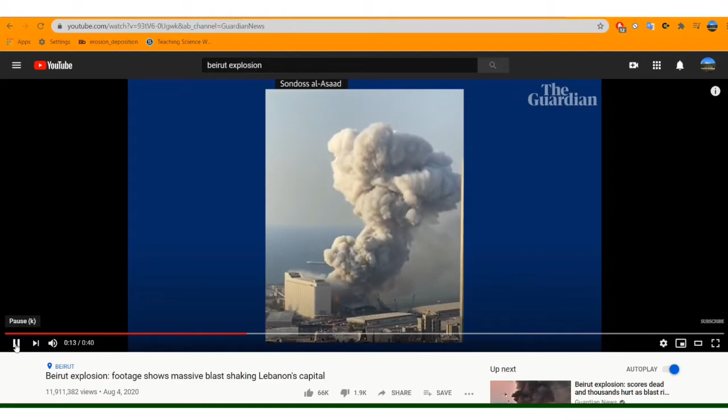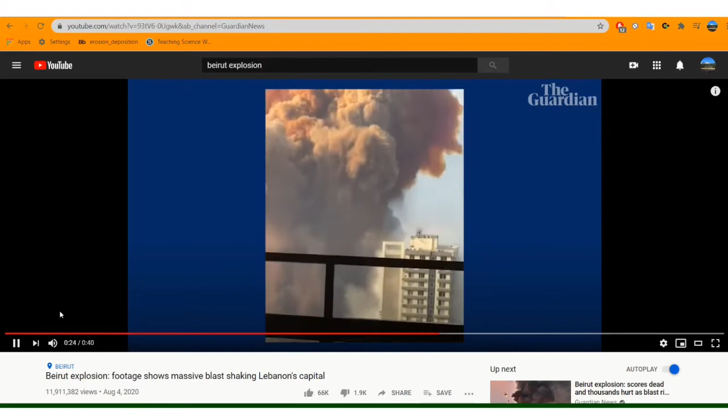Now, when you have an explosion inside your car, you don't want the energy to go out in all directions. You want it to go in one direction that will power the piston that drives your car.

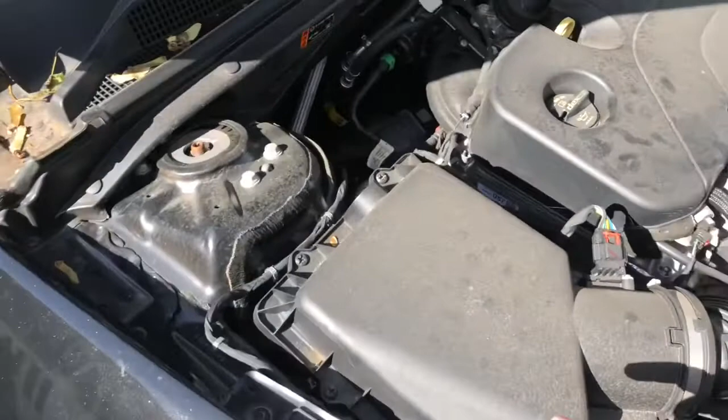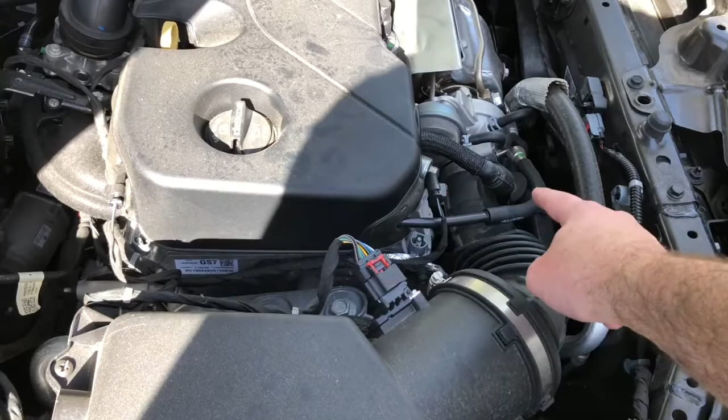So we said that in order to unlock the energy within the gasoline, we need to add oxygen to that. So how does that happen in a car? Well, the air enters through the grill in the front of your car. It then passes through the car engine air filter because you don't want particulate matter getting into the engine. Once all the particles are removed, the air can pass down through this tube into the engine itself.

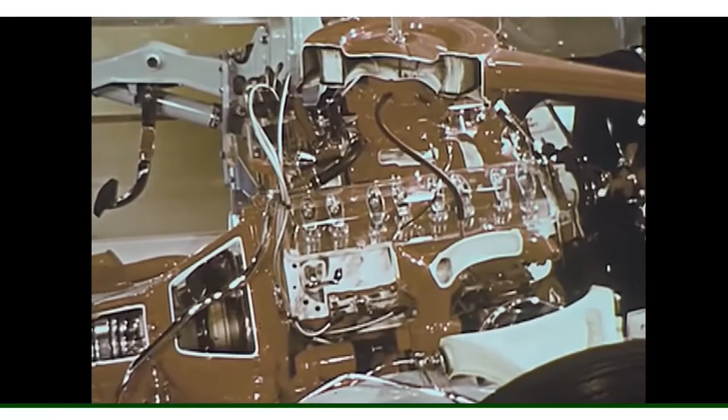Gasoline and air mixed together form an explosive mixture. The basic job of the engine is to convert this explosive energy into motion. To contain the explosion, the engine uses a cylinder, and fitting snugly within the cylinder, a piston that slides up and down.

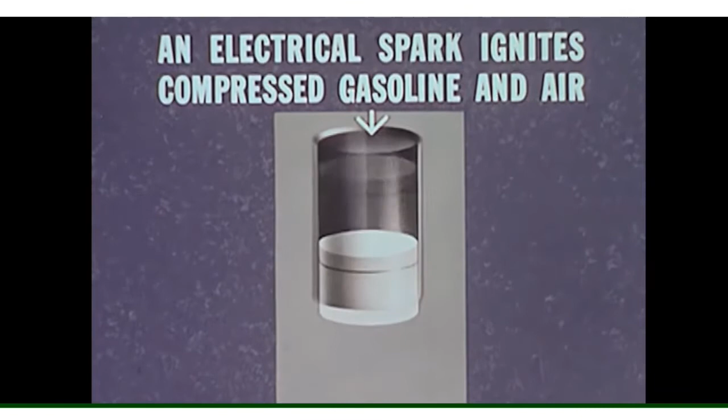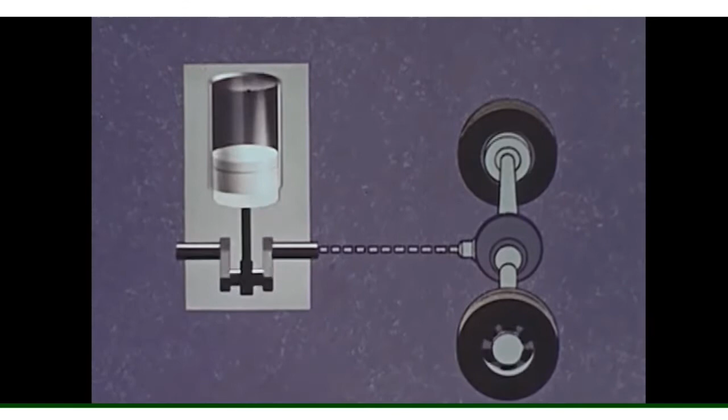Inside the cylinder, an electric spark ignites the compressed gasoline and air, and the hot gases from the explosion push the piston downward. The piston rod is connected to a crankshaft, which converts the up and down motion into rotary motion. The crankshaft then drives the rear wheels through various machinery, which we'll see later.

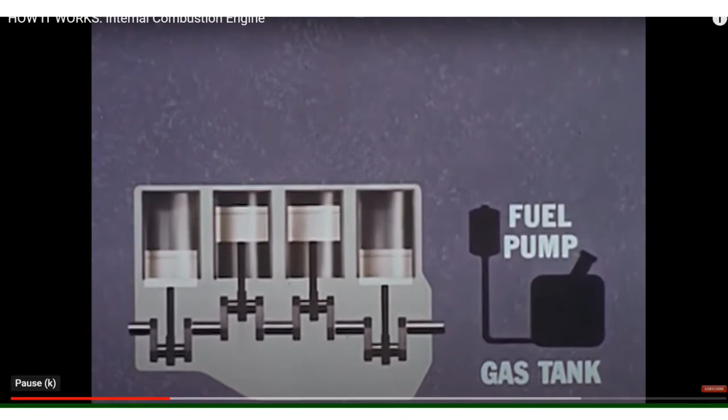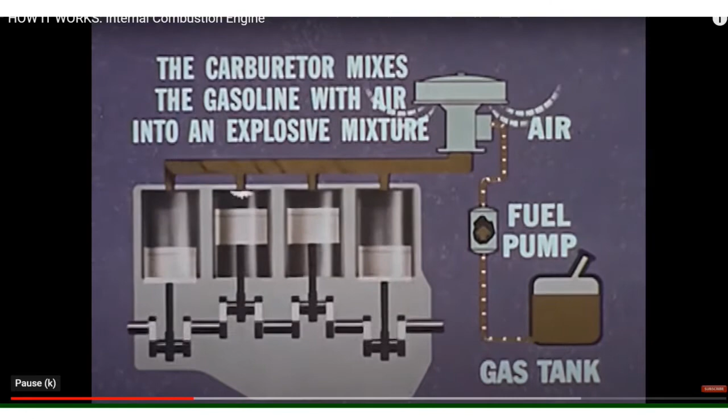For increased power and smoothness, modern auto engines have a number of cylinders driving one crankshaft. Gasoline from the tank is pumped by the fuel pump to the engine's carburetor through the fuel lines. The carburetor mixes the gasoline with air to form the explosive mixture that drives the pistons.

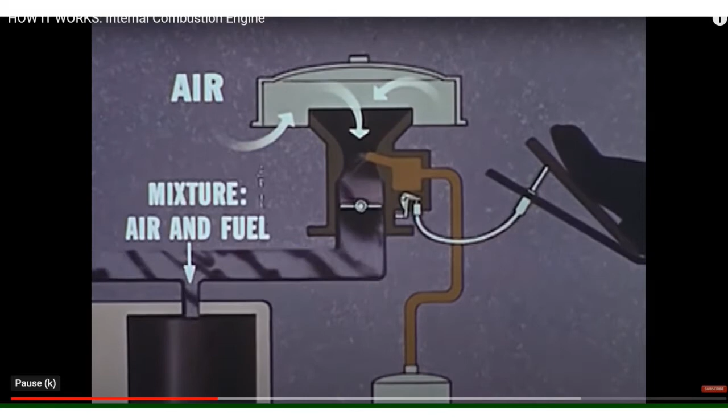Here's a closer view of the carburetor. A linkage connects the accelerator pedal with a valve in the carburetor. Stepping on the gas opens this valve wider, increasing the gas flow and speeding up the engine. Easing off on the pedal reduces the flow and the engine slows down.

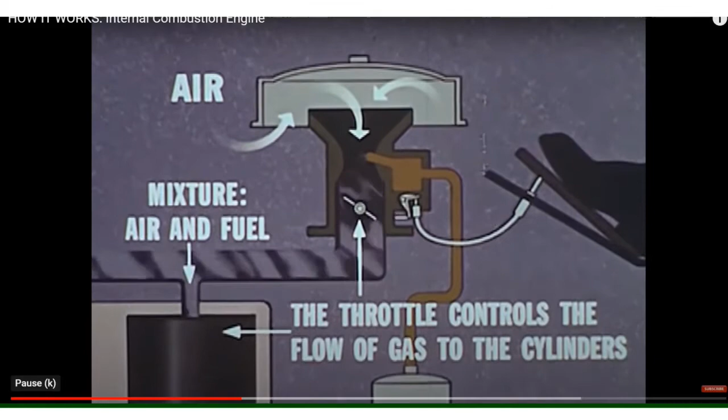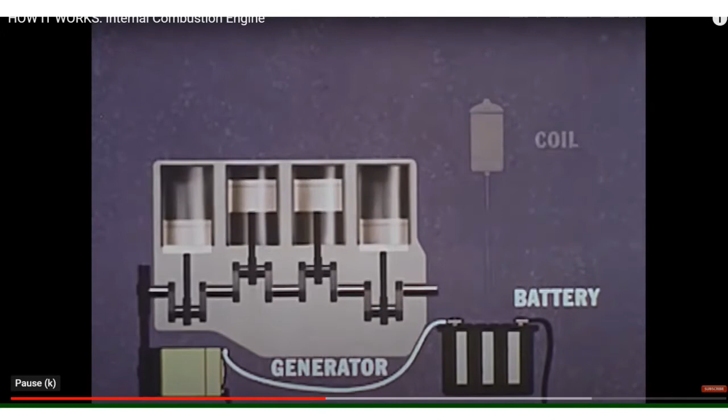The engine's electrical system supplies the spark that fires the fuel mixture. As the engine rotates, it drives a generator which keeps the car's battery charged. The battery supplies electricity to the coil, which boosts the current to a voltage high enough to produce a spark, and then sends it through the distributor to the spark plugs located in the cylinders.

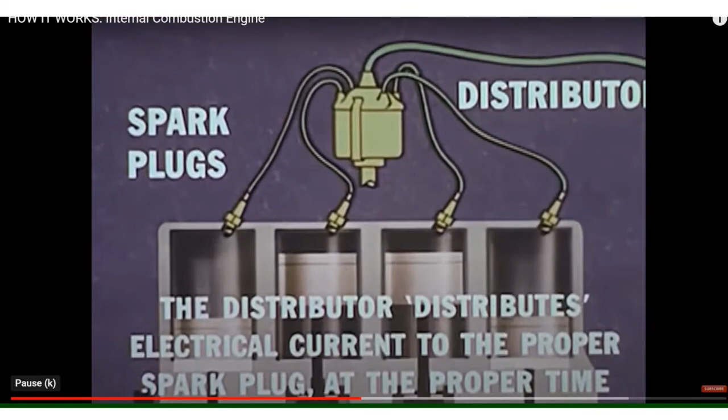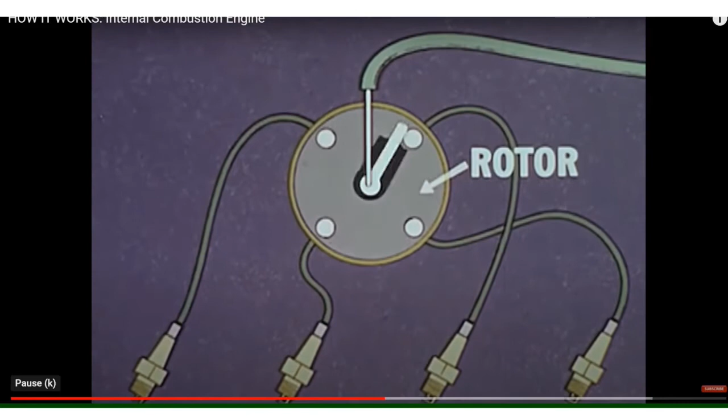The distributor distributes electrical current to the proper spark plug at the proper time. Inside the distributor is a rotor, which as it turns, touches a series of contacts, one of which is wired to each spark plug. The points open and close as the rotor turns, interrupting the current to produce the fuel-igniting spark.

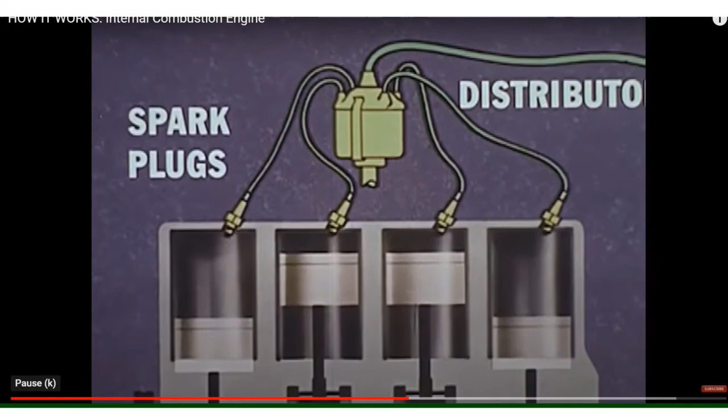Here again are the major parts of the engine's electrical system: the generator, the battery, the booster coil, distributor, and spark plugs.